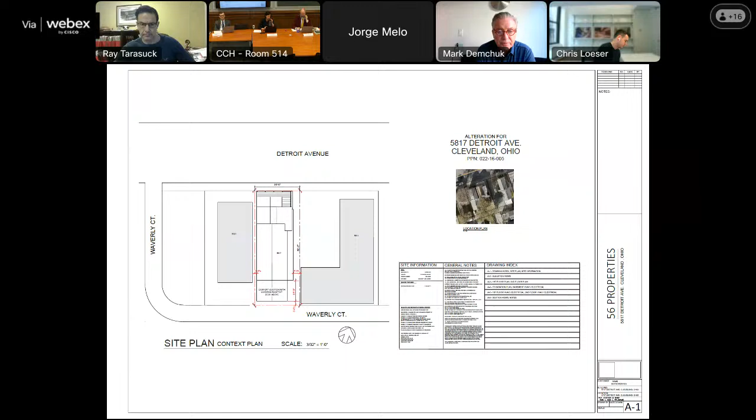Good morning, everybody. My name is Mark Demchuk. Jim Travato owns this property, and Brian Jurassic is our architect on this project. At the last meeting, we were in discussion and agreement to take down the half roof and make the doors upstairs into 2 doors.

One thing I'd like to, I'll use the word plead, to the committee, is Jim and I, after revisiting this, the expenses got out of control to take down this roof and to take the doors out. It's going to be roughly 12 to 15 thousand.

Well, the doors themselves cost $6,000, and then new doors cost $4,700. And then the roof—by the time you take the roof down and replace all the hardy board, it'll be another, let's say, $5,000. So it's becoming a very, very expensive deal.

So my proposition to the committee: this building below, the brick building on the first floor with the 4 windows, that was not the original building. Because if you look back, I think in 1895, it was not the original building. Somebody put it up. I don't know what year they put it up.

Be this said, if you look at the 2 houses to the west of me, they're exactly the same distance from the street. And again, this extension was built sometime probably in the mid-1900s, 1940, 50, something like that.

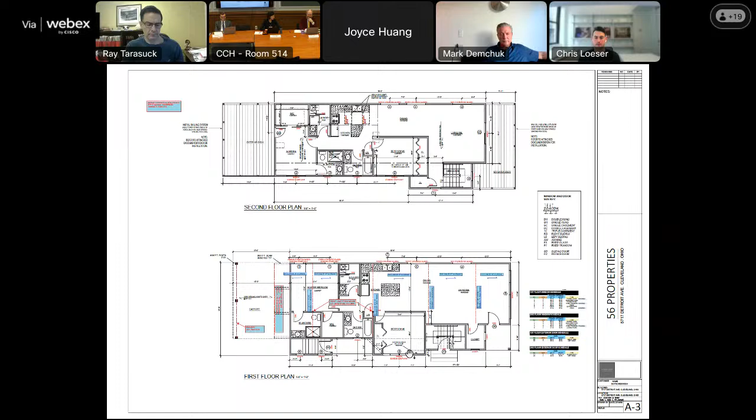Ms. Anderson? No. Should I move that we approve the addition of that porch, but with the doors the way we originally approved the doors, and for the first floor windows to be consistent with what we approved originally?

So point of clarification to Mr. Brunges, we didn't make a motion on anything last time. We tabled everything associated with it. Correct? Two weeks ago. It was just tabled in totality, but we asked that they go back to revisit those other elements. But we originally approved this project with a different configuration for the doors and for the first floor windows a few years ago. Yes, it's been about two years. Okay. But the process has been going on for...

So just to clarify, the motion on the table is to approve as presented, requiring the front elevation to match the drawing that was submitted versus the existing conditions. This would require modification to the doors on the second floor to match the drawings, a single pair of doors, and modification to the first floor storefront so that it is continuous versus the pair of windows. Is that correct, Michelle? Correct. Okay, making sure we understand the motion is very clear what we're approving and not approving.

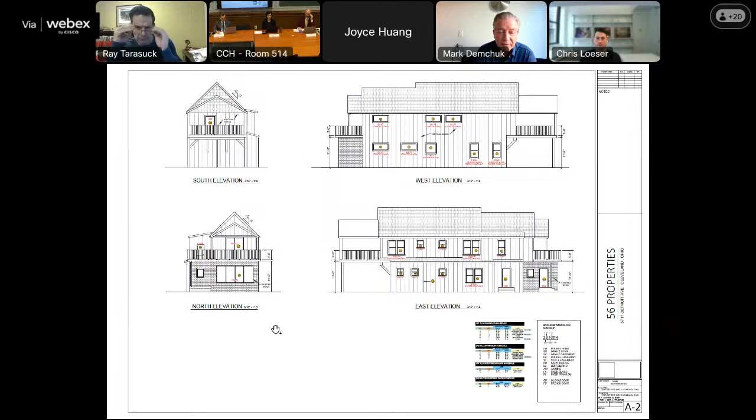Not rift, but it's very frustrating to me. So please, I'll agree, but in consideration, those 4 windows look very good with the 2 doors up on top, as you can see in the bottom left. Architecturally, the house is beautiful. It was run down before. The houses next to me are run down. I'm trying to beautify this neighborhood - I grew up here. It just makes logical sense. Everybody I talk to, including people from the city, says that front roof makes this so appealing because of that eyesore sticking out that was never approved. But anyway, I'm trying to address an architectural transgression.

So I just hope everybody can take this all into consideration. And it sounds like I'm groveling - I probably am, because it's been a very frustrating 2 years for me because I had a bad partner. But again, my partner is no longer with us. At this point forward, we'll do everything to the city's specifications. So yes, let's please table this, and I'll see you in 3 weeks.

Okay, well, thank you for your approval to table. Do we have a motion to table? I'll move to table. Do we have a second? Second. Right, we have a motion, we have a second. Any further discussion?

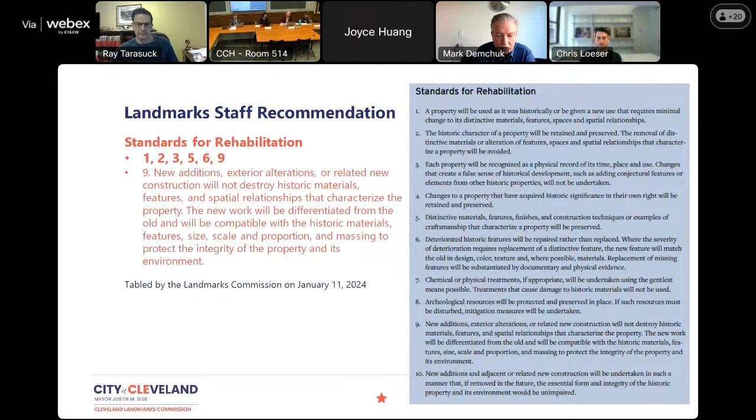Mr. Messam, please call roll. Ms. Anderson, yes. Mr. Dreyer, yes. Mr. Dulick, yes. Director Wong, yes. Mr. Loeser, yes. Mr. Tarasuck, yes. And Ms. Trott, yes. Madam Chair, the motion passes unanimously.

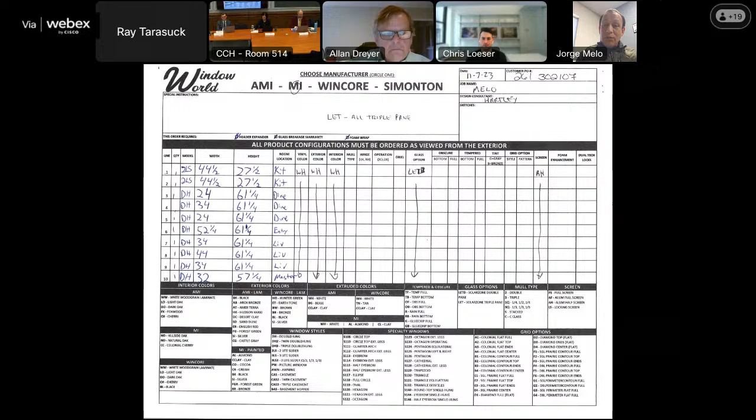The Window World estimate for the front windows is $6,910. Another quote is from Infinity Marvin, that is $16,872.10. And the last one is Renewal by Andersen, for $23,063. So that's very expensive - I cannot afford those prices. Window World is doing basically all the windows for a lower price than that.

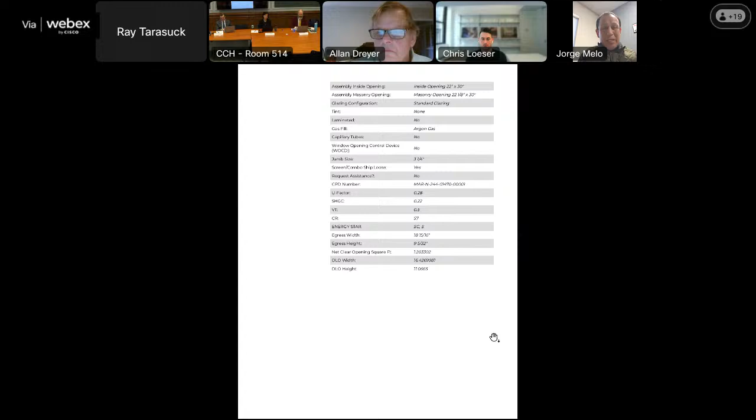And I need your support on that. I'm trying to make this place safer - I don't want to have any hazards because the windows right now are not functional completely. I'm trying to do my best to make the people living there more comfortable and safer.

Thank you for the presentation and bringing this information forward. We do appreciate it. We'll then move on to Landmark staff recommendations.

Thank you, Madam Chair. As we noted, this was approved previously with the removal of the front windows. We should note that vinyl replacement windows were approved on the sides and the rear, but not on the front of the house. The commission had asked for a more appropriate material on the front, and this has been a consistent requirement of the Landmarks Commission in my time here - we're going on 8 years at least, if not longer.

We understand that there is a cost difference, but we have to maintain the integrity as best we can of the historic districts. So we would still recommend sticking with, we understand the applicant's concerns, but we have our job we have to do as well, so we recommend the higher product on the front.

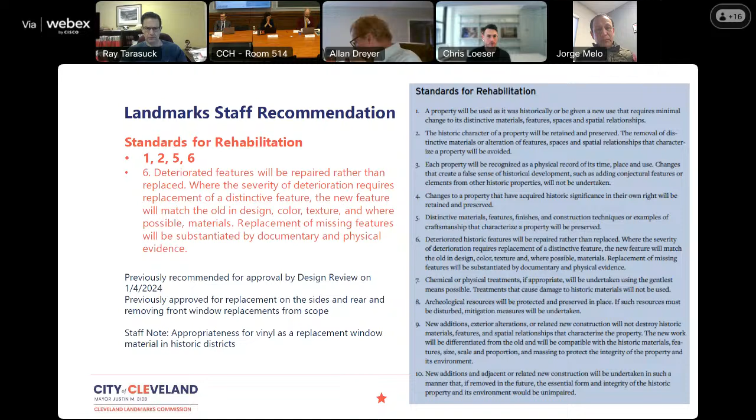So what would you recommend? We would recommend withdrawing your application to allow you to proceed with the work on the 3 elevations, and then reach out to staff offline. They can give you sources to look into funding, and you can apply once you decide on your direction of materiality and manufacturer. You could come back separately for the front. So with your permission, we'll withdraw your submission at this time.

Okay, it's good. Okay, I'm sorry. Thank you. Sorry, one more question. I'm sorry, yes, go ahead.

When will the permit to replace the side windows and all the other windows be available? Why don't you reach out to staff offline after the meeting, and they can give you more information on that.

Okay, sounds good. All right, well thank you very much. Thank you, your honor, have a wonderful day. Have a great day, you too. Thank you, goodbye now. Thank you, bye-bye, bye-bye.

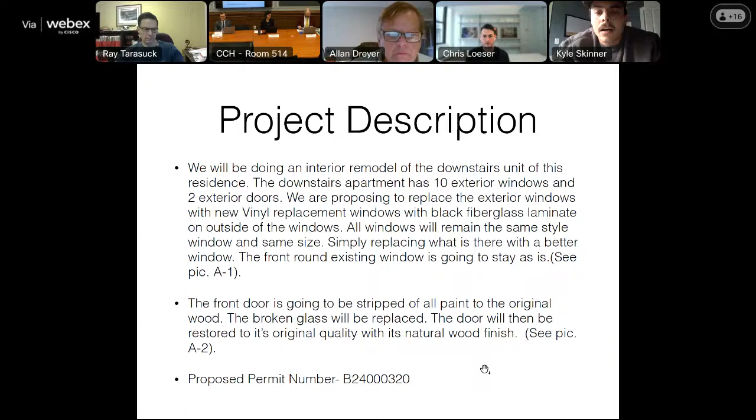Hey everybody, my name is Kyle Skinner. I'm proposing a window replacement at my property at 6614 West Clinton. Right now we're talking about the downstairs unit; this is an upstairs-downstairs duplex. We're trying to replace the 10 exterior windows on the downstairs unit. We're proposing a new vinyl replacement window, with the exterior a black fiberglass laminate clad on the outside of the windows. All the windows will stay the same size and basic style. The only other items are the front door and round window, which you can see here - they're both in pretty bad shape.

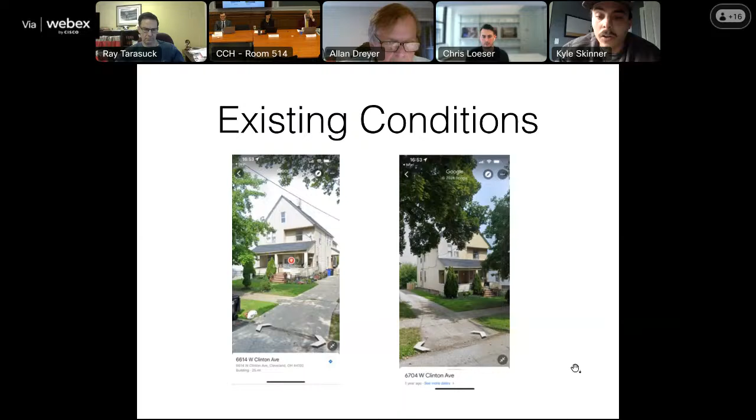We're going to refurbish both of those. We want to strip them down to the existing wood, refinish it, get new glass, and make it look like a new old door - same with that round window. You can see the existing conditions of the house; the exterior windows are horrific, they don't open, you can feel the breeze blowing through them. So we're trying to get something of a little better quality in there, and that's the windows we're proposing. That's all I've got.

Okay, thank you for the presentation. We'll move on to design review committee recommendations. Thank you, Madam Chair. This project was reviewed by the Historic West Cleveland Design Review Advisory Committee on January 17th. They approved the project for replacement of the first floor windows, with a recommendation to consider wood or alternate materials on the front elevation - there are 2 windows there - and to think about future renovations and the style and framing of the windows. There was a lot of discussion on the work done on the home, since work had been done previously on the 2nd and 3rd floor, and future changes such as siding and how the trim and windows would interact with that. Overall they thought the windows would be recommended, just with preferred higher materials on the front.

Excellent, thank you. Moving on to landmark staff recommendations. Thank you, Madam Chair. Staff feels that while the owner has made some significant improvements to this property, between what was already done without review and approvals, the several windows being proposed today, and the work required to complete this rehabilitation, we feel it's most appropriate to table this item and have the applicant come back with the full scope of work for this project, so the commission can review all of the work instead of just a handful of windows on the first floor.

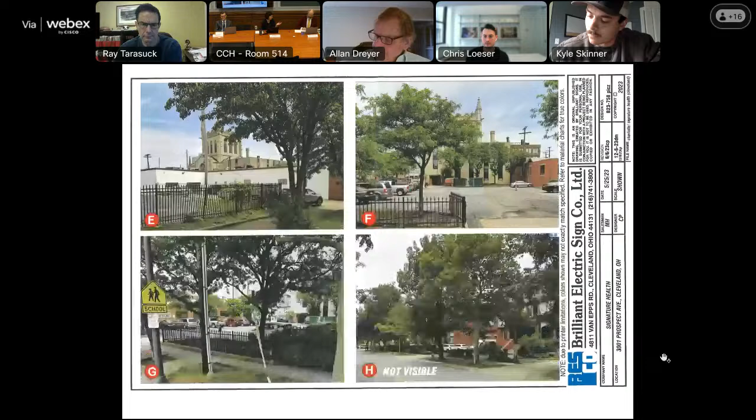You're welcome to stay for that, just to see it concluded or not. But I do have to ask, since we have permission from the owner to table, would someone like to make a motion to table?

I'll make a motion to table. All right, we have a motion, do we have a second? I'll second, Madam Chair. We have a second, any further discussion?

Mr. Musson, please call roll. Ms. Anderson, yes. Mr. Dreyer, yes. Mr. Dulick, yes. Mr. Loeser, yes. Mr. Tarasuck, yes. Ms. Trott, yes. Madam Chair, the motion passes.

Thank you, and to the owner, Mr. Skinner, feel free to reach out to the Landmark staff and they can walk you through what their recommendations are. Okay, thank you very much, appreciate it. All right, thank you.

We'll move back to our third applicant, Signature Health Orca, located at 3001 Prospect Avenue. Hi, I'm back on, I moved over to my coworker's desk.

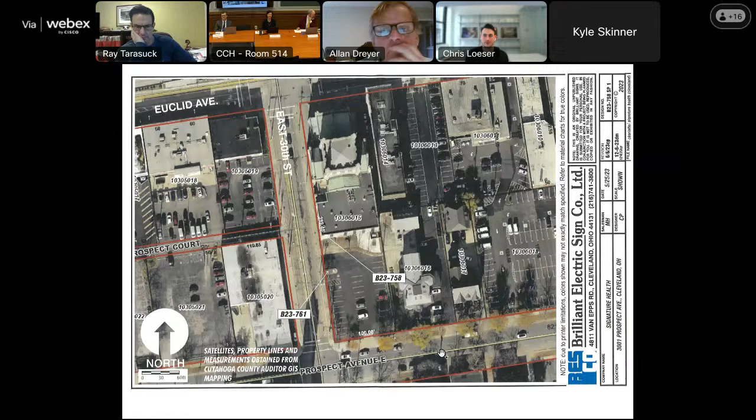I'm sorry, something must be wrong with my audio. Not a problem, please go ahead. Yeah, so I'm Laura Woima, I work for Brilliant Electric Sign Company, and I'm representing Signature Health. We were at the design review meeting last week, and they asked us to change a few things, which I'll get into, but the first slide shows the site plan, and B23758 is the wall sign.

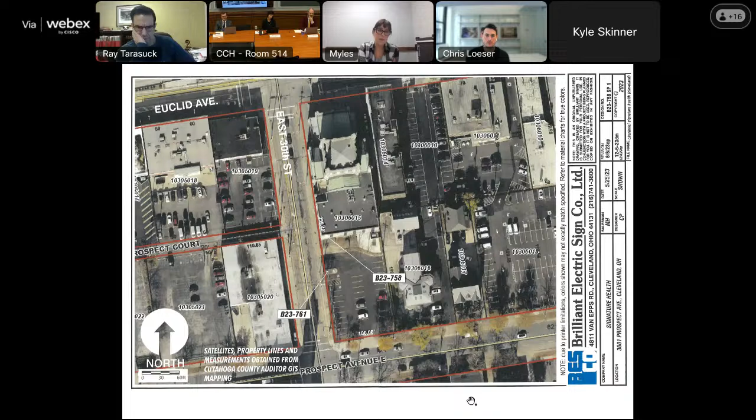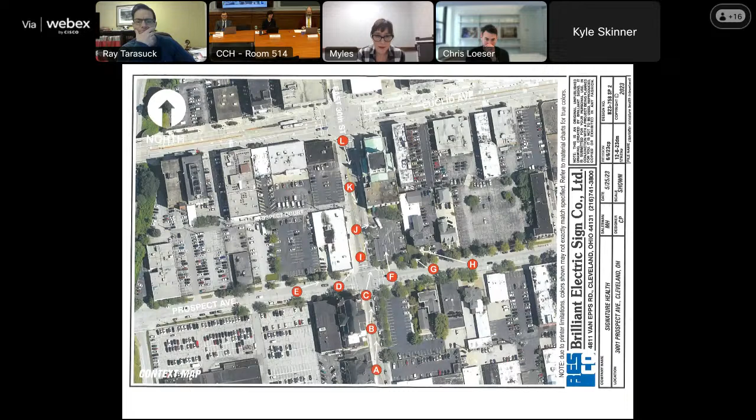And the B23761 is the ground sign. It's just an overview to show a context map of the building and different parts of East 30th.

Some had asked us why it was on that side. That's so that it has visibility, because if we moved it over to the other side, it wouldn't have the visibility for people to see it on the corner of East 30th.

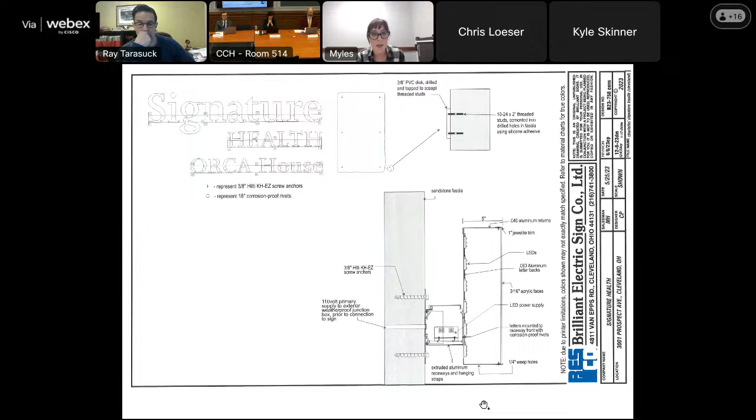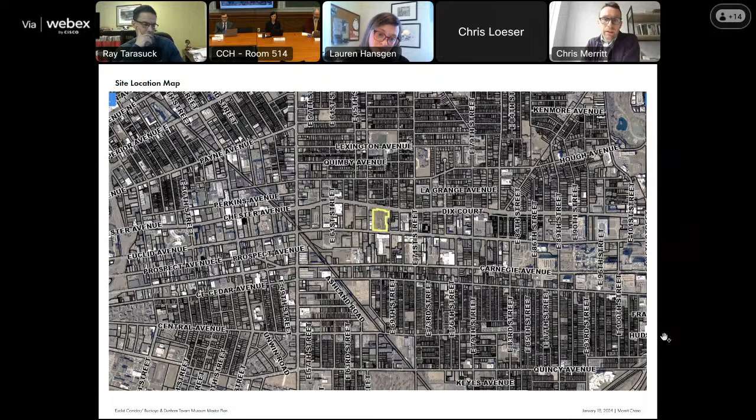Thank you, Lauren. Madam Chair, if appropriate, can I share my screen to walk through the presentation quickly? Unfortunately you cannot, the submitted presentation is controlled on this side. Okay, that's fine, thank you. Just tell us what slides to advance. Okay, thanks.

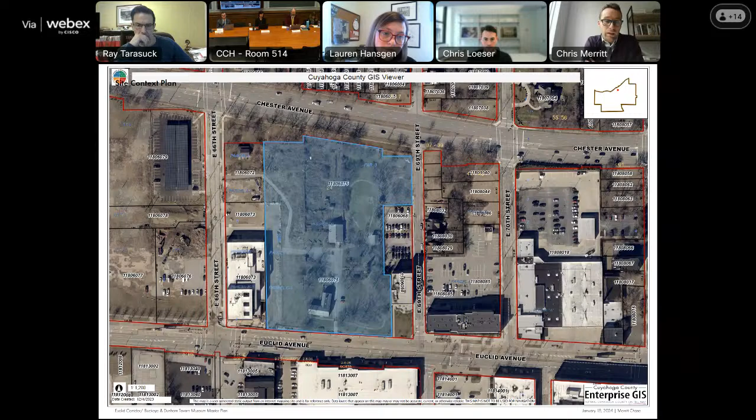These first few slides just show you a little context of Dunham Tavern Museum and Gardens. You see the blue outline here of the Dunham property between Euclid and Chester, 66th and 69th. We'll show more of this, but you can see the Cleveland Foundation headquarters, which just moved to this area on the southwest corner of the property. Next slide.

As Lauren mentioned, we've been working with Dunham on a larger campus master plan that is in context to the Cleveland Foundation's move to Midtown and much more development happening around Midtown, with Dunham as a kind of public open space at the heart of this. Next slide.

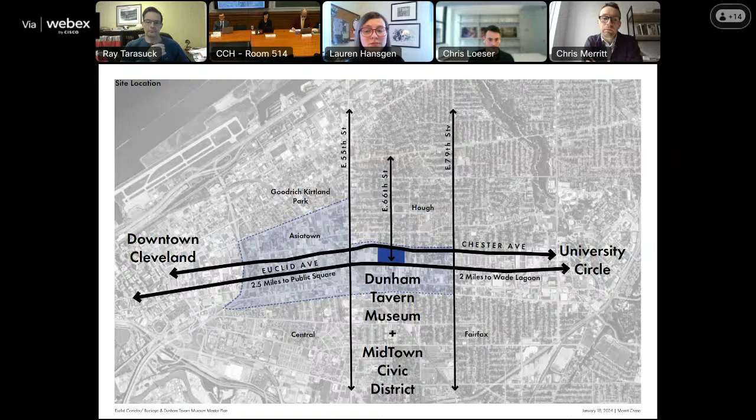This just shows a little context of some of that investment happening along East 66th Street and how Dunham connects to that. Next slide.

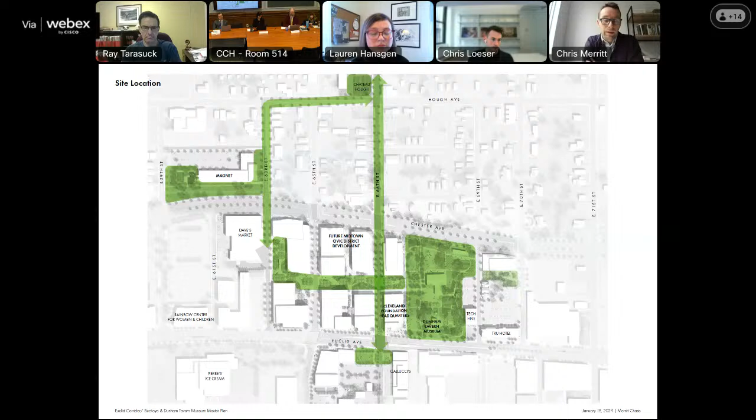As part of some of this larger planning, we've been working with many partners in the community on future development in the district. Part of this includes a new east-west greenway that would connect Dunham, the campus, to this future investment happening in Midtown and the Hough neighborhood. Next slide.

You can see that illustration here, and what we're here to talk about and seek approval for is a first phase implementation of the Dunham master plan, which includes a heritage trail, the public path that loops around the campus, and a new driveway and parking court from East 66th Street. Next slide.

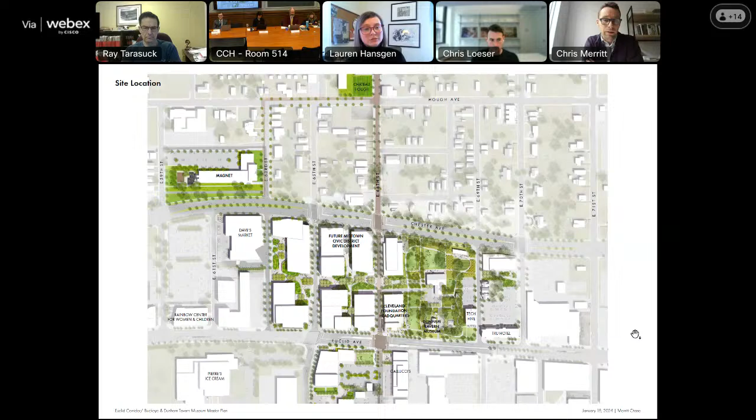Then we have a few photos, so you can see here a more current aerial of the campus with, as Lauren mentioned, some of the deferred maintenance, clearing of a fence that enclosed the property, some invasive overgrowth, and the farm that used to be on the campus just to the north of the existing barn there. Next slide.

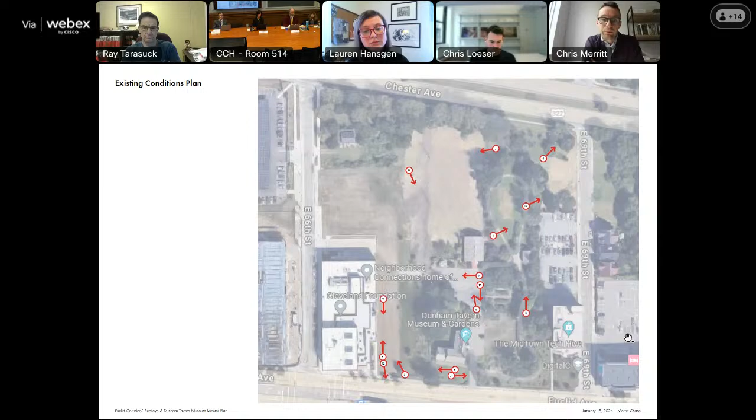You can see the new Cleveland Foundation headquarters there, where the Heritage Trail will connect that building with Dunham.

And then this is the existing parking area and driveway, where we'll be putting a new parking court thanks to a sewer district green infrastructure grant that will connect to another sewer district project the Cleveland Foundation implemented at East 66th Street.

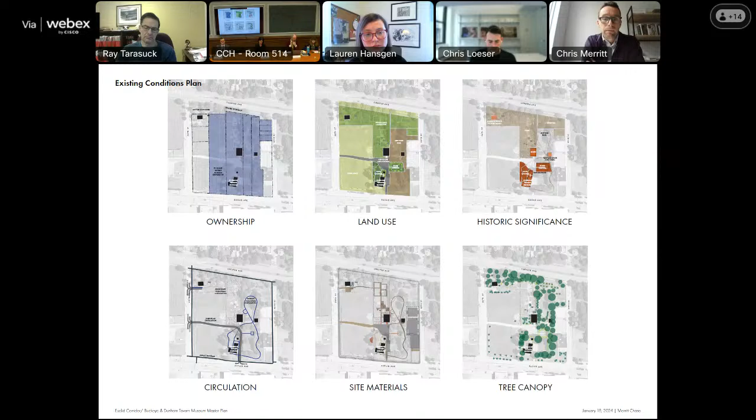Some other existing conditions, just thinking through those during the master planning process.

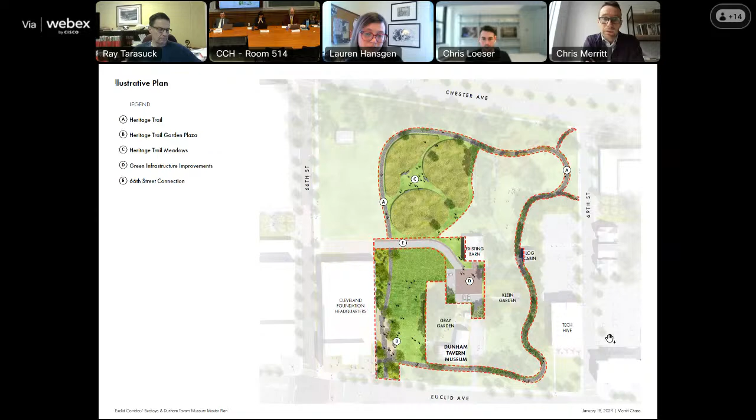This shows the full scope of that. There's also regrading of the property that will happen to align the driveway, trail, and new meadow.

Just to go through materials, the Heritage Trail will be a stone dust trail. We have sandstone pavers for the patio, permeable pavers for the parking court, and a chip seal asphalt driveway.

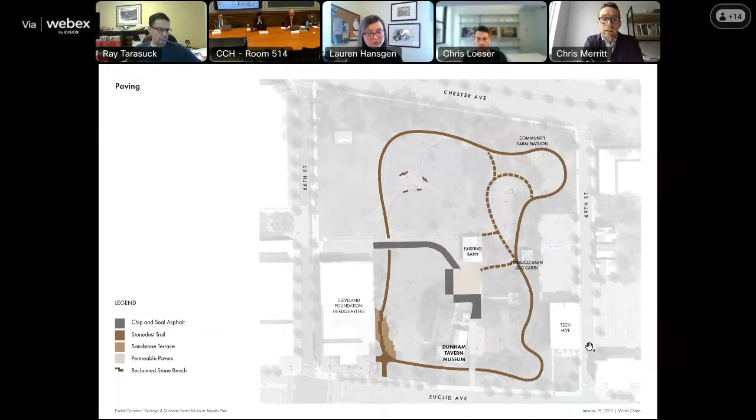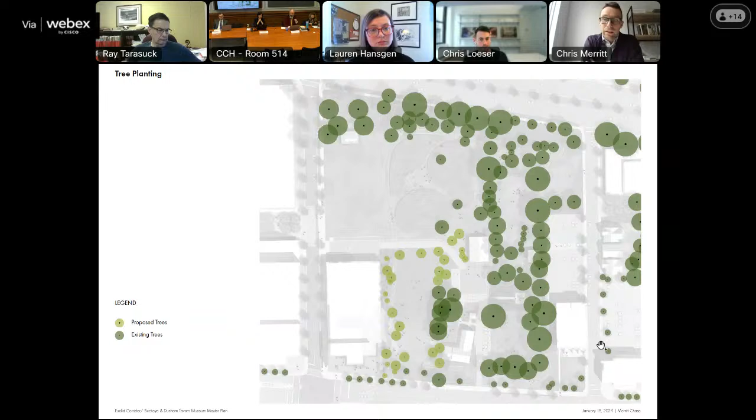We're also planting new trees on the property. Unfortunately, the recent tornado dropped some trees on the property, so we're replanting from that as well as in alignment with the new master plan.

The different planting will replace the lawn in the middle, with new garden areas along the edges, and then the meadow to the north.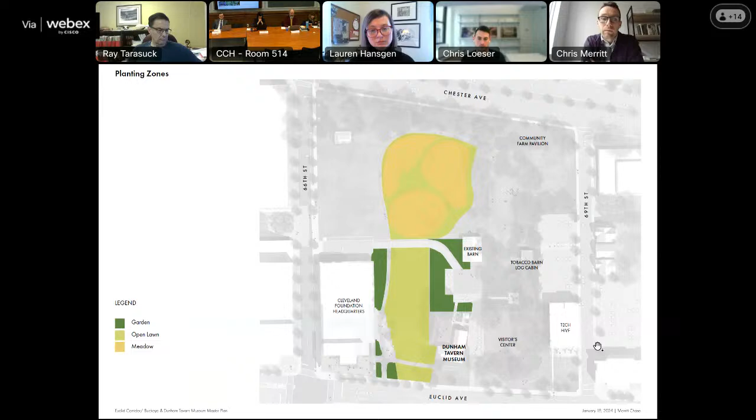This is the character of the different trees and planting, which will have four-season interest.

And then this is the full illustrative plan. That's it.

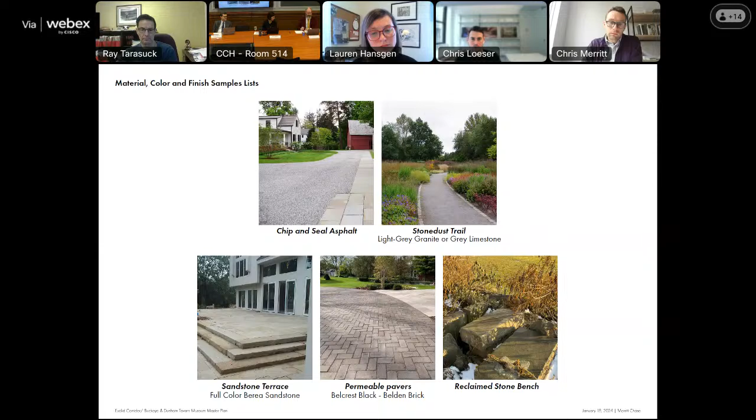Yeah, Madam Chair, it appears there's a front stoop and then some sandstone directly in front of that — you can see it in the lower right-hand picture here. It just extends out maybe 8 feet from the door.

Not sure about how old that sandstone is, or if it's something they added in the fairly recent past, but we just want to make sure that if it is historic, it's maintained. Would the applicant, Mr. Merritt, like to respond to that about the sandstone?

Happy to, thank you. In that bottom right photo, you can see a couple red flags, from an initial field test of the alignment of the path. So the path will run right up against the edge of that sandstone patio to preserve that stone. And we're actually using a sandstone cobble to address your prior question at those crossings around the driveway, as a tactile strip to promote safety and crossing and be consistent with materials. You can see some of that detail in the drawings submitted as part of the application.

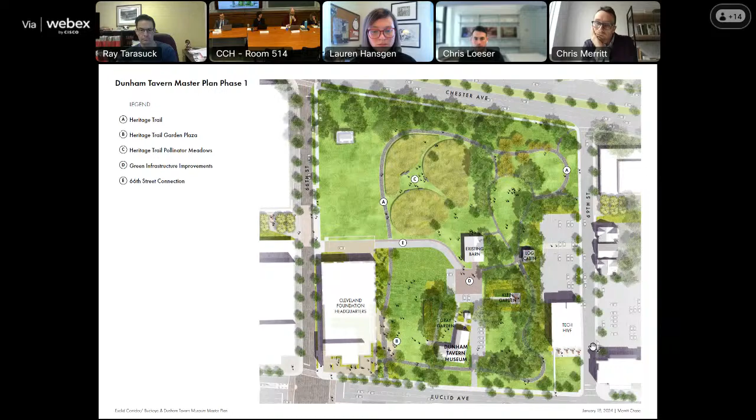Thank you for that clarification. We did have someone from Midtown here, Ms. Tzeng.

Yes, hi everybody, my name is Karis Tzeng. I'm from Midtown. To the chair, to the commission, just wanted to express support for this plan. I think it really beautifully moves the master plan for Dunham Tavern forward, and it really opens up the historical significance to the community, and I love how it's going to link neighbors to see the historical significance of the museum and the grounds. So really thrilled to see this move forward.

I will also note that I believe it integrates a number of priorities in the neighborhood master plan as well, including opening up more community gathering space, honoring these historic places, and connecting a number of both institutions and other stakeholders to each other along this corridor. So just wanted to add that to the conversation. Thank you, awesome, thank you.

We'll then go back to the commission for questions and comments. Madam Chair, I have a comment. Yes. Thank you, just want to echo the young lady who just spoke about enhancing that area, because I spent some time at the Dunham Tavern a couple years ago.

They gave a community outing. It was fantastic, it was overwhelming. They gave a tour, it's absolutely beautiful over there. The inside of the tavern itself is miraculous. Not knowing the history and how it engaged with the community, for them to understand what that Dunham Tavern is all about and what it represents in that community as a whole.

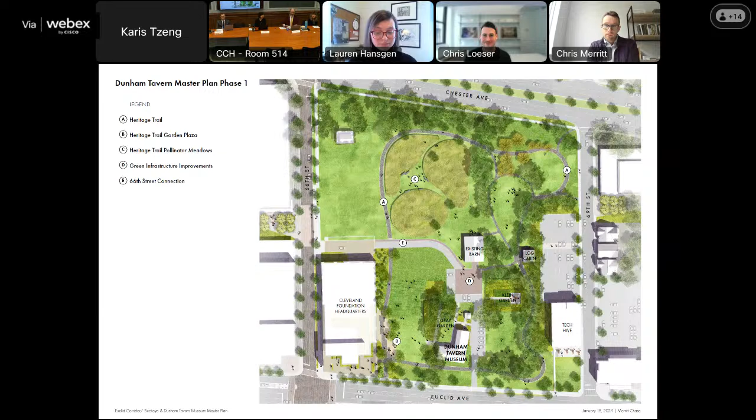Other questions and comments from the commission, or would someone like to put forward a motion? Hearing fairly unanimous support. Someone like to put forward a motion? Ms. Anderson. Move to approve as presented.

Do you agree with the conditions that staff had stated, the conditions of returning for signage and lighting? Yes, return for signage and incorporation of the sandstone, and detailing how the path crosses the drives? Yes. All right, so we have a motion with some conditions, do we have a second?

A second, thank you Councilwoman Gray. Any further discussion? Mr. Messon, please follow. All right, Ms. Anderson, yes. Mr. Dreyer, yes. Mr. Dulick, yes. Councilmember Gray, yes. Mr. Loeser, yes. Mr. Tarasuck, yes. And Ms. Trout, yes. Madam Chair, the motion passes unanimously.

Congratulations, we look forward to seeing your project move forward.

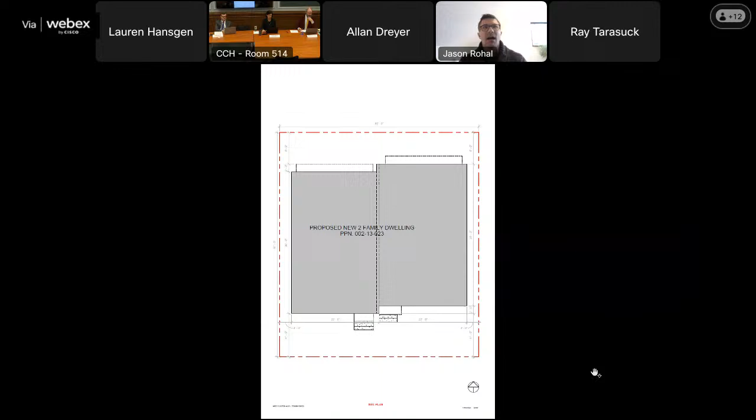Pedestrian access was very important to the block club in the neighborhood. The homes themselves acknowledge Clinton Avenue. As you're walking down Clinton Avenue, there is a large gap between 2 existing homes there, which the block club of the neighborhood were very eager to support a home that was acknowledging the facade or the frontage along Clinton Avenue.

Wouldn't mind advancing to - I think the imagery, the 3D renderings might tell the best story right here. If you wouldn't mind advancing another couple slides past the floor plans and the elevations, we can always go back to those, but going one more, please, or maybe 2 more, I think.

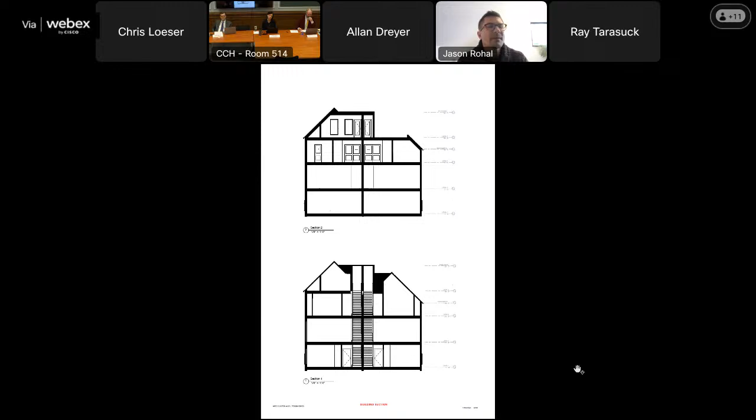Yep, got the sections in there too. If you wouldn't mind advancing another one. There we go. So these images best depict the homes as they're situated with the massing surrounding them as well.

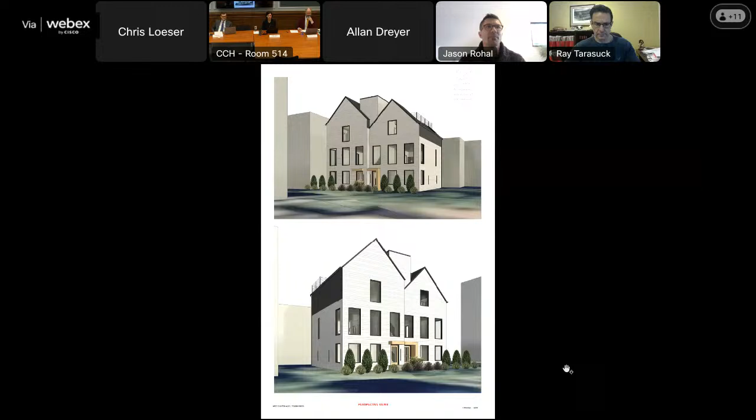So as we're looking at the top image, we have existing homes surrounding it. This is as if you are walking along Clinton Avenue, looking northwest. You can also see the large masonry building that is immediately to the north of the homes. So we're bringing in a good amount of light from the south facade and acknowledging that relationship to Clinton Avenue.

The main tenant entryways to the homes face Clinton Avenue. There are walkways that flank the homes on either side with lighting interspersed along the side to maintain some visibility and safety as well.

From a material standpoint, we're proposing Hardie plank throughout - hardy plank white siding here is what you're seeing from these principal facades. So using hardy plank along the front, we've got a tongue and groove cedar accent off the front entryways. You'll see the lighting along those areas as well. We have some plantings separating these properties from the adjacent property immediately to the south.

If you wouldn't mind advancing to the next slide, please. Along the rear of the properties, we have the same tongue and groove cedar as well as hardy plank wrapping the facades here. You see some lighting interspersed.

There was some discussion in the Ohio City Design Review meetings about the pedestrian and vehicular entry as well as the rear facade in general. We've added some overhangs, some additional materiality there, introducing the tongue and groove cedar over top of the pedestrian and vehicular access off of the alleyway.

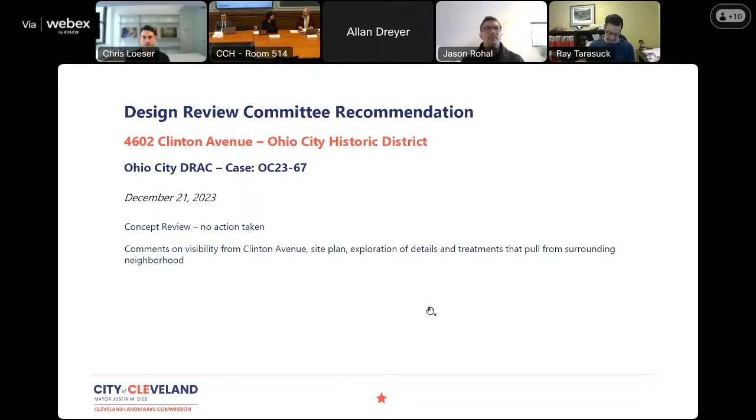All right, thank you. I'll move on to Landmark staff recommendation. Thank you, Madam Chair.

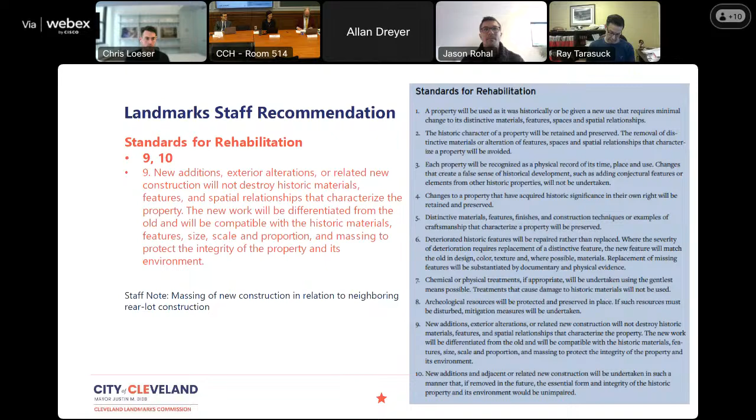We are supportive of the concept of having these homes there. The massing, I think, could be adjusted a little bit. One of the gables is slightly taller than the other, and possibly having them at the same height would be nice. The home in the rear directly next to it is about a 2.5 story building, then there's the currently backyard of the home on Clinton, and then 3.5 to 4 story townhomes a lot over. So pulling more from that context, I feel the gable is slightly overly large on one of the proposed units.

So having that still pull from the neighborhood and have designs pull from the neighborhood, but maybe adjust the height a little bit. We look forward to seeing it progress, with a clear site plan with measurements showing the distance from the adjacent houses, the street, the alley, as well as a height study and streetscape study showing those sight lines for the building and the large industrial building directly behind it. But overall, we look forward to seeing it develop.

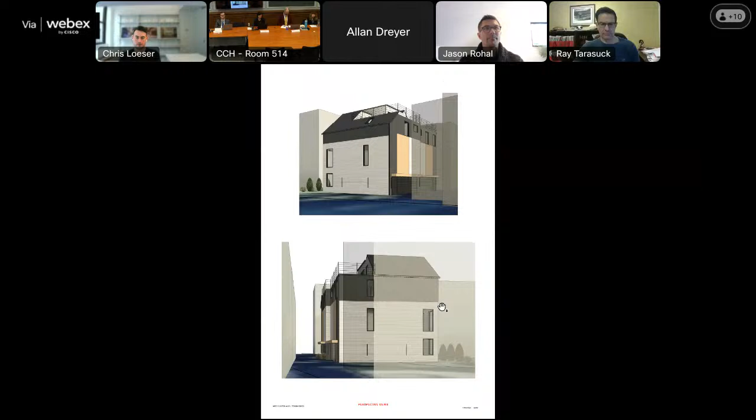Would you mind going back to that, Carl, one additional slide forward, I believe, right there. Could you explain that a little bit more? It looks like you mentioned there's garage doors and man doors on the lower level. And then what's the brown material wrapping it again?

Currently, that's proposed as the tongue and groove cedar, but I think per Mr. Loeser's comments, it will likely move towards a composite material that is going to give some warmth and is a little bit better from a durability standpoint. And then what are the two colors adjacent to that, yellow and white? So the yellowish color, that's the tongue and groove cedar currently proposed, and then the white is just the white hardy plank.

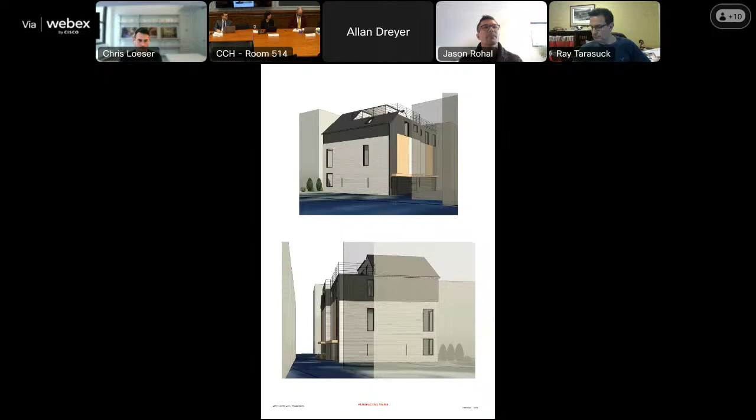Okay, going through that in a little more detail would be helpful. So that whole wall is solid, there's no windows besides the third floor. That's correct, and that's a product of there being a dark brown large industrial building immediately adjacent with zero articulation whatsoever on it. So with the design of the northern facade, you start to have windows as they barely peak above the roof line of that existing building, and then you have the occupiable roof deck on the upper level to be able to get over the height of that building.

I would encourage you to look at adding windows here. Although the view may not be great, the daylight would be nice within the spaces. I think sometimes you forget how many people actually put up curtains and shades, so it's not always the view, it's often the daylight and allowing that into the interior of the structure. So I'd encourage you to explore adding windows here as you rethink the materiality.

Madam Chair, I think it's a really interesting project, and the whole concept for the staff comments of these back houses, I too like the variety and the height. I just wonder if I'd like to suggest exploring maybe some of that variety between the two distinct houses based on height, not just limited to those upper parts, but let it filter down with a little more differentiation. It's almost like the first two floors are pretty much the same, and then you vary the top. But I think that's actually a way to reflect the historic nature. If they were two separate houses, they wouldn't necessarily have been the same height, so I think that's really charming.

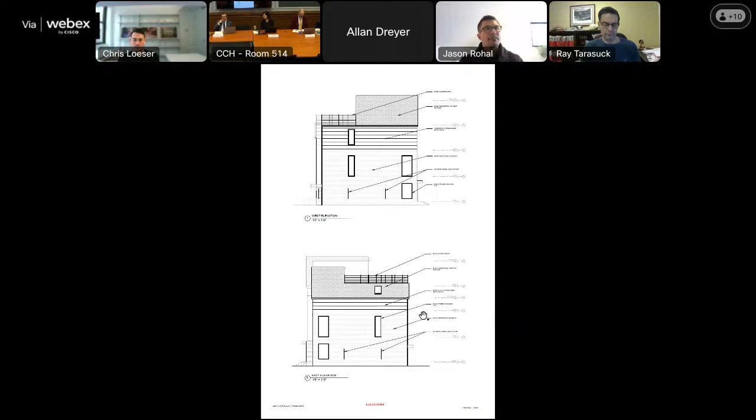But the modern vernacular, I think, can be appropriate, especially because it will be kind of glimpsed, I guess. The window comments are taken to heart from Ms. Anderson. So yeah, I agree with a lot of my fellow commission members' comments, but I'd like to see some more exploration for that variety, in the spirit of honoring the historic quality of this whole enterprise of two back houses. But I think it can track through a little more and still be a modern expression. And the color, I think the white does really make it pop, so I guess it's a question of whether that's good from a neighborhood urban design perspective, or whether it might want to recede a little more with a gentler color scheme. Thank you, good presentation.

Any further questions or comments from the committee? Mr. Brundges? Madam Chair, I apologize, something that just noticed while I was looking at this thing.

On the other drawings, we show downspouts on the outside ends. How will the drainage from the roof in the front, in between the two units, be addressed? Because it looks like the way it's pitched and the way it's coming down, it's going to come down right on that front door, on the interior.

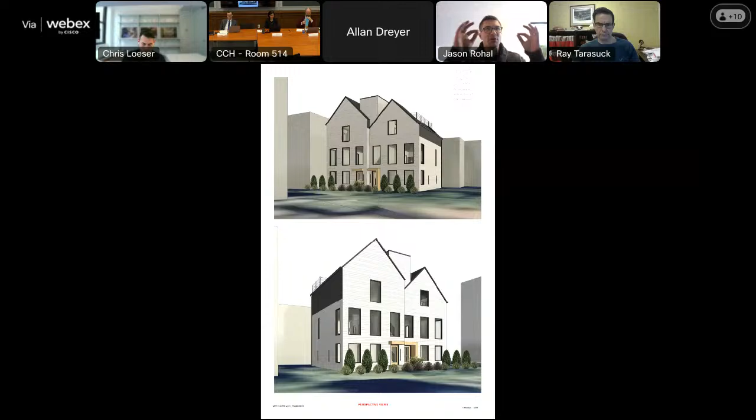Yeah, so right now, anything shown as appearing flat is all sloping towards the north side. The gutters and downspouts are shown towards the north side of the home, so you'll see them kind of peeking through right there. But there would be a slight gutter line if it's not shown currently right there—everything will slope towards the north side of the home. Along the south side, I saw someone's cursor along that south side; that's basically just the fascia kind of peaking. There's only maybe an 18-inch or 12-inch portion of that fascia that peaks in front of the stairs at the southern portion. So right there, it's essentially going to drain down in that same plane as the overhang. We could tuck a gutter, if necessary, on the south facade, kind of in that juncture point between the two masses. But on the north side, everything is draining along that pitched roof to the north side.

Right, yeah, just look at how that little step between the two buildings and that little piece of roof is coming down. I think that's where Mr. Bruggs is focusing, so that you take care of the water versus having it go on the floor.

Understood. Madam President, yes, I just have a question. I'm not familiar with this particular historical neighborhood, but just listening to the other comments from my colleagues here—the townhouse structure that you have in that community—does this townhouse fit in with what the other houses look like? We know that the modernization of homes will be changing in the historical districts per se, and I understand you have to use certain materials for the change to be approved. However, would this particular structure flow with the other homes in that neighborhood on that street per se?

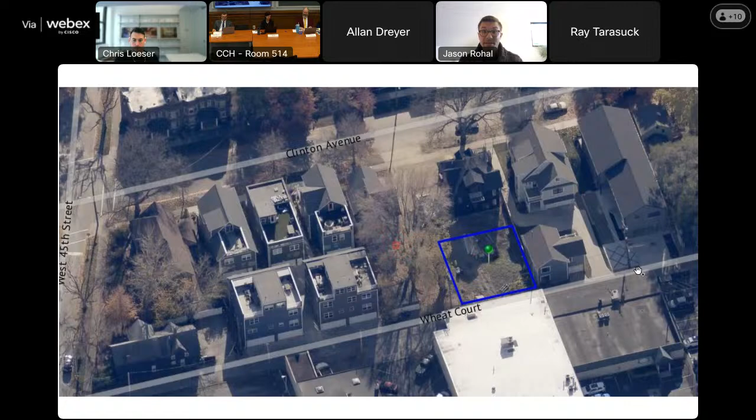Thank you. Not seeing any additional feedback from the commission, does the applicant feel we received enough feedback to continue developing your design? Yes, absolutely, and I really appreciate all the feedback everybody has given. All right, thank you, we look forward to seeing you come back with your final design. Thank you so much.

We'll move on to our next applicant, located at 1898 West 25th Street, shell improvements to that building.

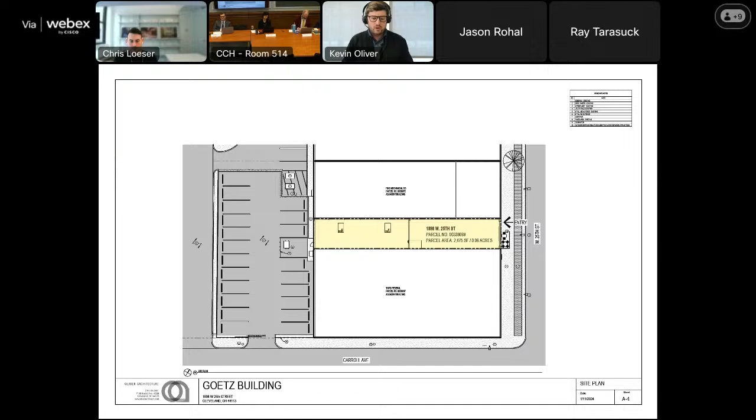The site plan shows West 25th to the right and the rear parking area to the left. The building has a taller three-story portion towards West 25th and a lower two-story portion towards the rear. Mechanical units and exhaust fans are proposed for the lower roof portion, not visible from West 25th Street, since the third floor height will conceal that.

On the West 25th side, the proposed alterations are to install a new storefront at the ground and transom levels, then repair the trim work and repaint the rest of the facade. The second story fixed storefront windows would be replaced with new ones, keeping all the applied detail, including the spindles and paneling below them.

Those would be retained, repaired, and repainted. Moving up to the third floor, we're repairing the existing hung windows, repainting them, and installing a new storefront where there's currently a compressed opening, enlarging that, then replacing and repairing paneling around it to match the rest of the facade.

At the rear of the building, as the photo showed, it's not in great shape right now, so we'll tuck point, repair, and replace openings with new ones. From our local design review, we discussed the existing fixed gridded lights at the back, which this image shows infilled with three double hung windows. We'll propose replacing that with an in-kind storefront window, not adding more masonry, keeping that opening intact. On the right you can see where the rooftop units will sit, shaded in gray, with the lower roof sloping slightly up to the three-story portion beyond.

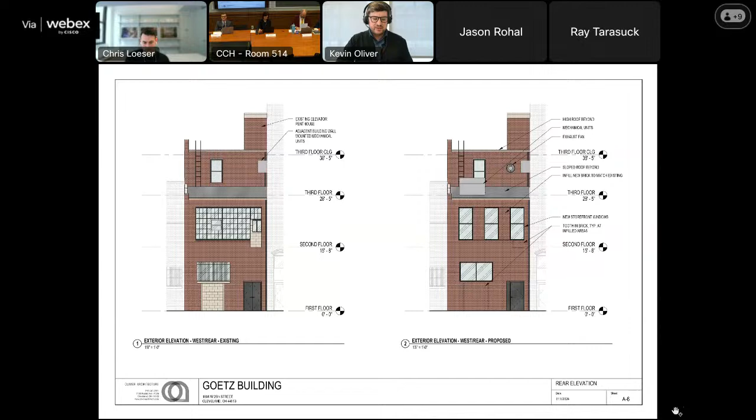There are some existing CMU infill openings; we'd remove those and tooth in new brick to match the existing.

Material-wise, we have a charcoal storefront system throughout the front facade. Trim and other materials, like fiber cement that are added and repaired, will be painted to match. In the transom area, we're proposing a painted metal grid to recall the prism glass that once existed there, giving a sense of that in our new alterations. We're also proposing wide stile storefront doors and rehabilitating the brick and stonework on the front, cleaning and tuck pointing as necessary to bring the building back up to standard for today.

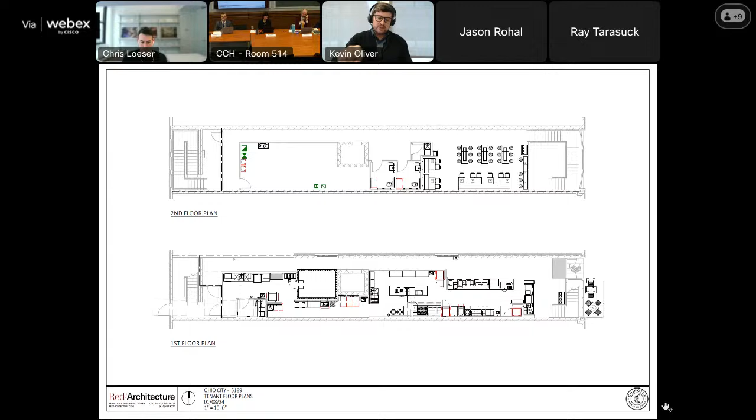Just for context, the floor planning and use of the building: the first floor would be the kitchen and ordering area. Part of the project is to install new stairs at the front and rear of the building, and an elevator. On the second floor, which is on top of this image, is where the seating area would be, and you can see how the front stairway has an opening between the first and second floor.

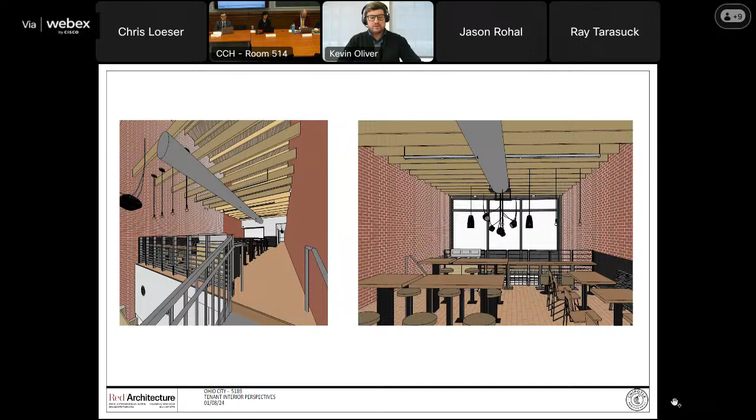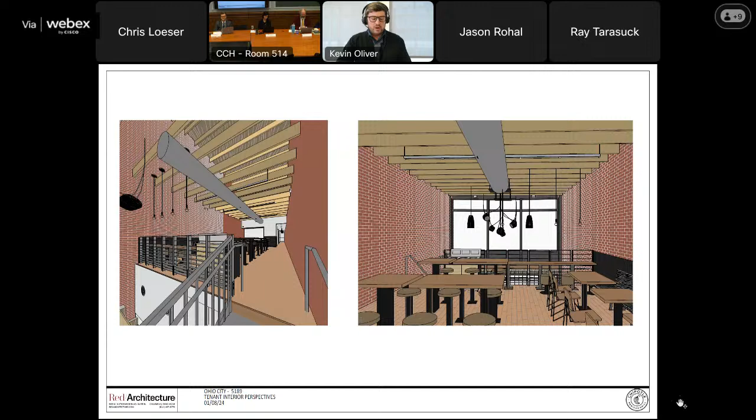Next slide. These are some schematic interior views. The one on the right looks from the second floor dining area out through the front facade facing West 25th. The image on the left is at the top of the stairs as you enter that second floor area, looking away from West 25th into the interior of the building. You can see the exposed framing there.

Next slide. Again, conceptual views. The left one is on the first floor looking back towards the front West 25th facade of the building—you can see the new stair wrapping up and its opening. And on the right, looking back towards the interior from the entry doors off of West 25th.

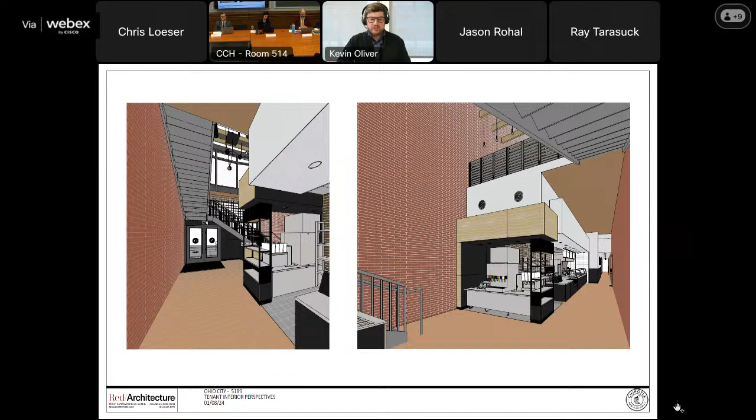Next slide, and I believe that is the conclusion. Again, happy for questions. Thank you for everybody's time.

All right, thank you. We'll then move on to design review committee recommendations.

Thank you, Madam Chair. This project was reviewed conceptually by the Ohio City Design Review Advisory Committee on January 18th. There was a lot of discussion about the West 25th facade, about the prism glass that was removed from the transom windows, and replacing upper floor windows with commercial systems. There were concerns about that, as well as the mesh being installed behind clear transom glass and its visibility.

There was discussion about the glass divisions for the transom and storefront windows, as well as the window configuration noted in the rear. Also a discussion about exterior signage that says 'blouses and dresses' painted on the second floor, which the committee would request to have retained if possible.

All right, we'll move on to landmark staff recommendations.

Thank you, Madam Chair. Some of you have been on the commission long enough to recall that another rehabilitation of this building was proposed and came before us in 2016. At that point, the owner had removed the prism glass transom windows without permission, review, or permits, and was planning on reinstalling them as part of the rehab.

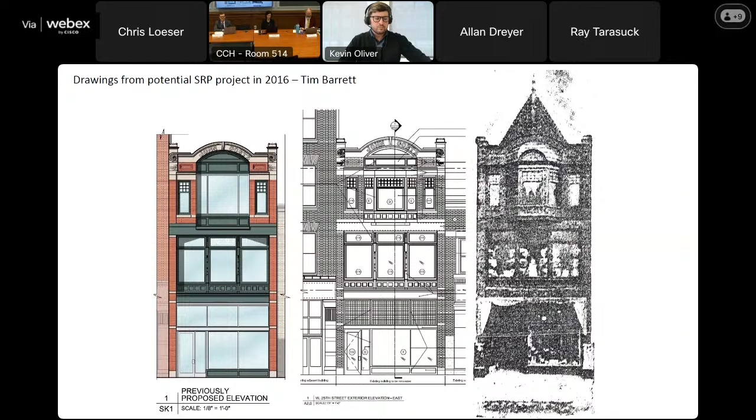We also noticed in the drawings presented, there's the RAM name that appears just above the storefront. I don't believe that's a historic name. I think that was just left over from RAM Electronics that was there for many years, and those are just little wooden stick-on painted signage. So if we can confirm that's the case, those should probably be removed. I just noticed they showed up in the drawing, so wanted to bring that up.

Our other big issue is the treatment of the 3rd floor windows. Tim Barrett from the Storefront Renovation Program produced a couple different options of how this could be handled, which are on the screen now. We're not saying it has to be one of these options, but with the historic images of the building we have, there is strong enough evidence to develop an appropriate replacement for the oriel bay that once looked out over West 25th Street.

We're very pleased to see some attention paid to this building and that it may finally be rehabbed after years of sitting by and watching the neighborhood improve around it. However, the historic character of this property is not being preserved as presented, as they propose to remove distinctive materials and significantly alter features and spaces that characterize this building, which is in direct nonconformance with the Secretary of the Interior standards, specifically Standard 2. This building is an architectural treasure and needs to be respected as such.

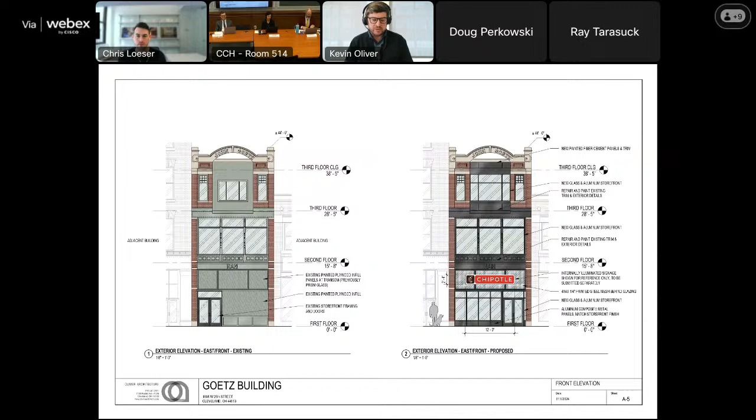Does the applicant feel like we received enough feedback to continue the development of your project? Yes, thank you. As you stated, we'll be in touch with staff and take the comments and continue with our process here. All right, thank you. Like we said, we like the developer, we like the proposal. It's just the front elevation needs to continue to be developed. Thank you.

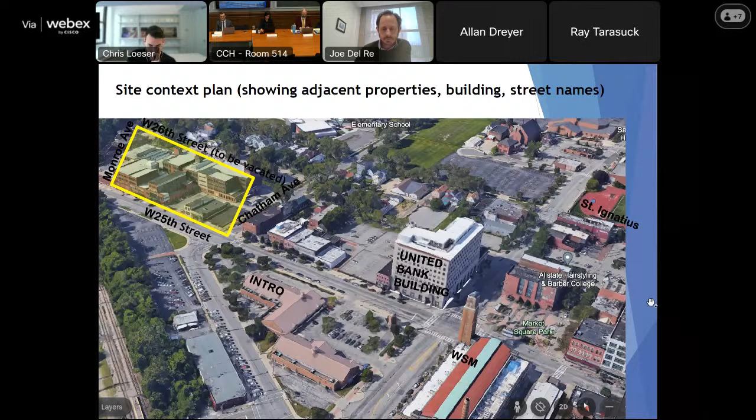So this is the West 25th Street facade, and I think it does a nice job of talking a little bit about the complex in general. The facility is comprised of 18 buildings. It looks like it's one factory, but it's actually 18 buildings built between 1870 and the early 2000s.

Our concept for this project is primarily a residentially driven redevelopment of the factory. But a key aspect of it is to break up the buildings back into some of the component parts by daylighting the vacated alleys of Hancock Place and West 25th Street Place. That would create some segmented buildings that we'll get into in a little bit, but also provide these interesting pedestrian walkthroughs that really create this into an urban village and connect it back to the other projects that have gone up in and around it over the past several years.

To open up some of the space and air, we'll also undertake some very minimal demolition of those alley covering areas, which we'll see at other elevations. If you can move on to the next slide.

This, I think, is going to be one of the central themes of the whole project. One of the ideas that got us very excited when we looked at the project was this parking lot, which right now is unassuming and rather boring, but when we take a closer look at it, you see some critical things. One is we already own the Citizens Pie building to the north of the lot. The idea of wrapping this parking lot with engaged retail or food and beverage uses and creating this almost like a central park or central green for the overall project is really what got our thinking going there.

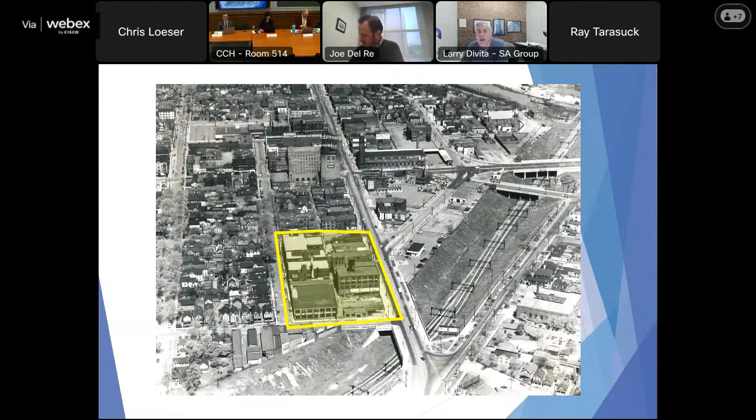Because each building section has its own character, the emphasis is to maintain the historic character of each section. Going through the process with SHPO and the National Park Service, it was very important to restore the masonry, replace windows selectively where necessary, and maintain the character of the building.

Thanks, Larry. If we could get into the site plan. Our conceptual site plan on the first floor—I think it's important to mention what we're hoping to do today is focus just on the redevelopment of the existing buildings themselves.

On the first floor, we'd like to eventually focus on a retail or other use strategy, but for today our conceptual concept calls for parking on the first floor facing West 26th Street, along with a residential lobby, leasing office, and bike storage area for both visitors and residents. We're also planning a fitness center on the first floor as a residential amenity.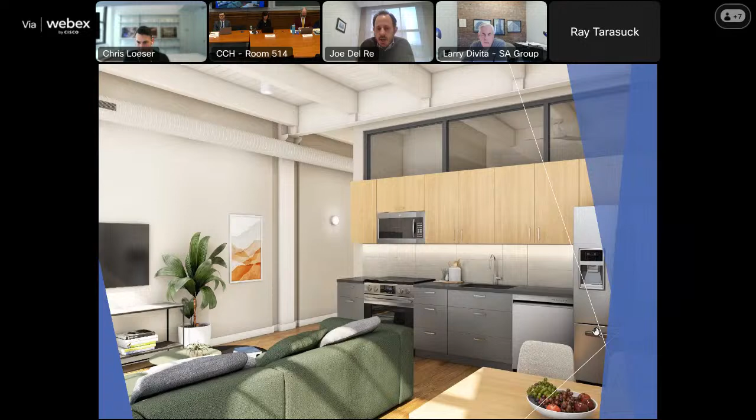The next slide gives you a concept idea of the design direction we're going for inside the residential suites. You'll notice some of the features being driven by the historic requirements, by SHPO, requiring us to keep some of these elements open.

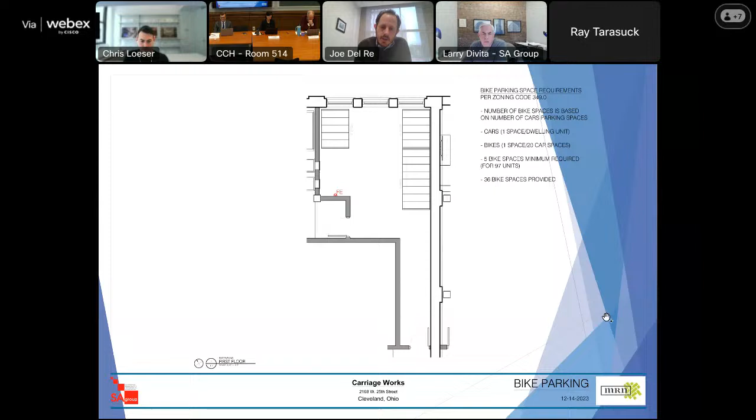The next few slides are just some residential amenities. We initially called for a 36 bike parking garage, but we've actually expanded that into a larger parking facility in our most recent updates. The next slide shows a proposed fitness center for the residents. Then the next slide brings you into a co-work concept that we're thinking about as an amenity to the residents so they can get out of their apartments and commingle in a work environment.

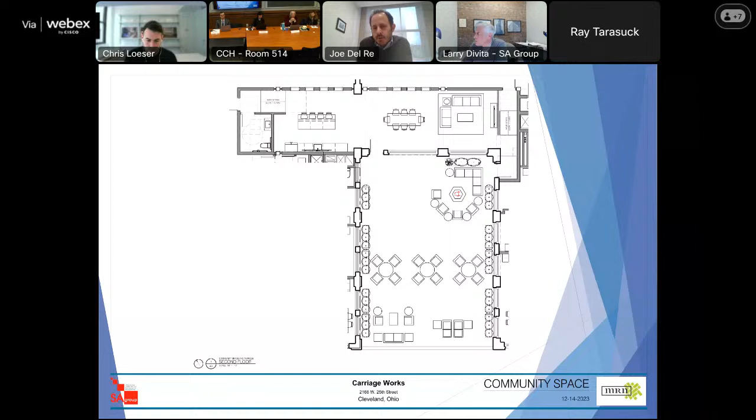The next slide shows a concept for a rooftop patio that we're looking at. There is a building called Building 12, it fronts on the alleyway. We are playing with some conceptual ideas of removing the corrugated metal facade and opening that space up for a rooftop park. This also shows another rooftop patio that may occur, fronting on Hancock once we open that up.

I appreciate the opportunity. All right, thank you for the presentation. We'll move on to design review committee recommendations.

Thank you, Madam Chair. This project was reviewed by the Ohio City Design Review Advisory Committee on January 4th, as a concept, so I did not make a motion. The committee members present were very excited about the proposal. Some of their comments included questions about the periods of significance established by SHPO and NPS, the possible lighting plan especially in the alleys and around it, and concern about a referenced vacation of West 26th Street and Hancock Avenue.

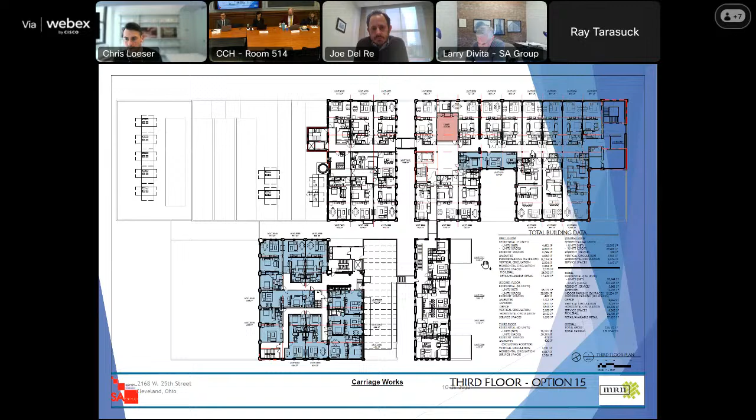I do agree with staff's comments and the local committee. I commend you for taking on such a large and gnarly little project, if that's the only way I can describe it, because there are so many different buildings, floor elevations, and so forth. I really do commend you, and I think this is a really creative reuse of the buildings and the entire site.

I'm just trying to get my orientation with some of the comments about the West 25th Street elevation removal. So this is 26 we're looking at now? If you go back a couple slides, or back further to the existing pictures from the beginning of the presentation, you'll get a good view of it. Right here. Yes, similar to that, just to keep the top portion, sure. I got it, okay.

So it really comes down to the details if we're in that much nitty gritty, which is excellent. Overall, what you're proposing I'm in full support of. But looking at the details the local committee raised about that small area on 25th Street, it would be nice to maybe maintain that, or put a gate there for the residents, to maintain the second floor brick elevation so you have a continuous elevation like there is now between Monroe and Chatham. I do think it would be good if that could be retained, even with removal of the covering over that alleyway.

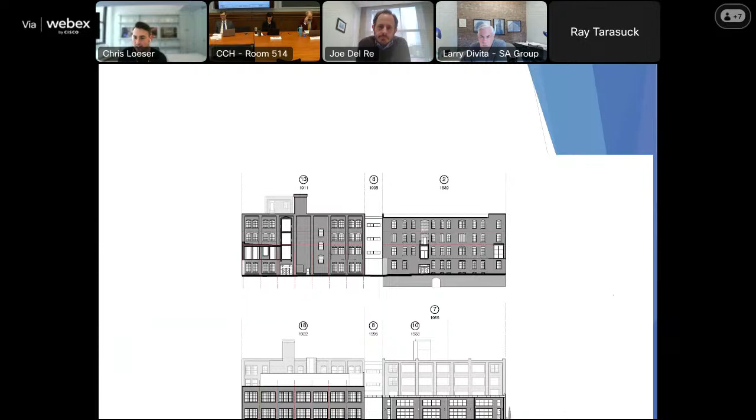Other questions and comments from the commission? Mr. Loeser. Thanks, Madam Chair. I too want to commend this group on taking buildings that are sort of there today and providing a higher and better use with residential and everything. I have a couple of questions or considerations.

One of which is, right now, the existing buildings, it seems like there's a first floor datum around almost the entirety of the property that's a painted, faded red. I think just paying close attention to what you're going to do to have it feel different. I don't know if the plan is to re-tuckpoint everything, if the intent is to repaint, or if the intent is to clean off all of that and expose the original. So just thinking about the consideration of that.

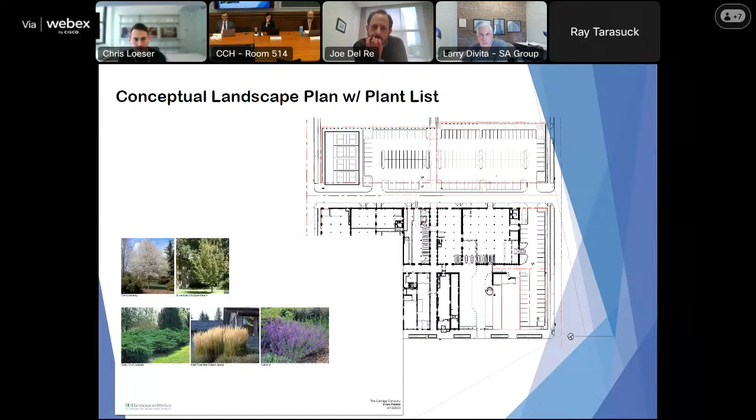The second, if you can go to the site plan again, maybe the earlier one. Dan, if you scroll down, I think it's a slide right after the historic pictures. I think slide 20. There. Yep. Awesome. Thank you.

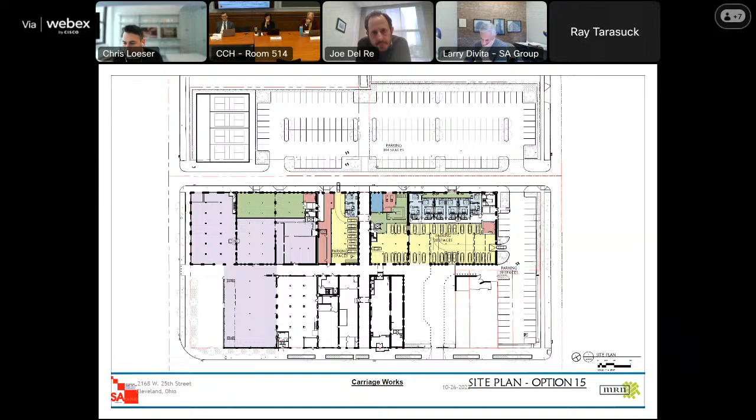So thinking about vehicular circulation to the parking that's at the first floor, it looks like there's an entry point off of West 26 to get to one side of the parking. It looks like there might be a circulation path through the open parking lot area, between the existing buildings and adjacent, and then the buildings as part of this project. And maybe it looks like there's another entry point off of the existing parking lot, I'm not sure exactly which is the cross street, to the right-hand side of this page. But just thinking about how vehicular circulation and pedestrian circulation happen within this complex. I don't know if this is the highest and best way to get the cars into the buildings or not, but just thinking about how those circulation streams happen with one another.

What else? So I'm also really intrigued by that idea of that central park concept, or that community amenity space within that open lot. And I'm really intrigued about how that continues to develop. I think that could become a really great amenity, not just for the residents here, but really bringing more people down to this area of West 25th. I mean, there's been a lot of progress marching south, and I think this is really going to add to that. So thinking about how that really integrates into that urban fabric, I think is really, really exciting and really compelling.

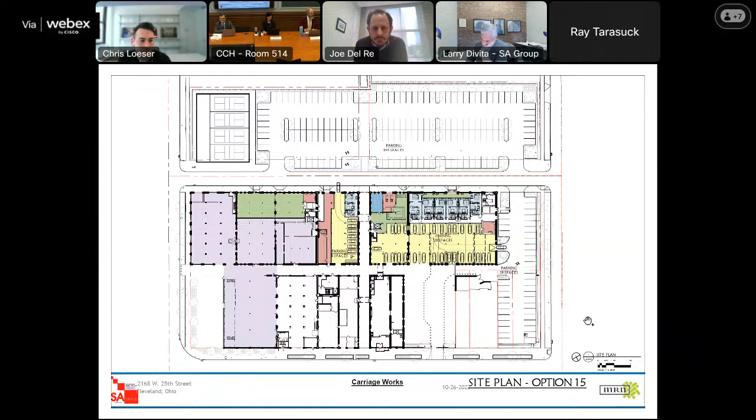If you can go to slide 16, I think, the one that shows the original bird's eye drawing. This one here. So I'm assuming this is looking at the West 25th Street side and not the 26th Street side. Yeah, that's right. This is looking from, you're hovering over the entrance to the Greenway here, so you're looking at Monroe and 25th. Awesome, thank you.

So I guess one consideration here is the alignment of the facades is of course different today than it was back originally. If you look further to the right hand side where you see the existing adjacent building, and there's a shorter building that has been demolished, I think that's where the open lot is. And then I think where the alleyway is showing might be the alleyway we're going to be reopening between the two blocks. But has there been any consideration to, I think there's a lower building that separates some of the taller buildings, is there any consideration there of bringing it back to maybe infill the upper floors to create more of a solid block between the two taller sections of buildings? And again, I don't know the history of how all of these things came into being or whatnot, but I think there's something about this view that provides some continuity of what this feels like as a mass, and less about piecemeal buildings that have progressed over time.

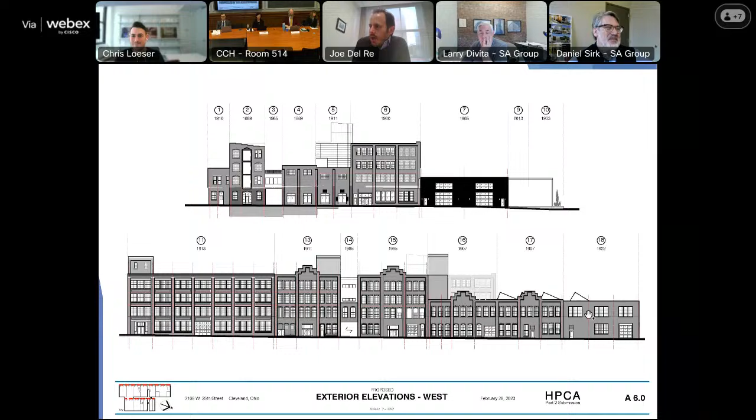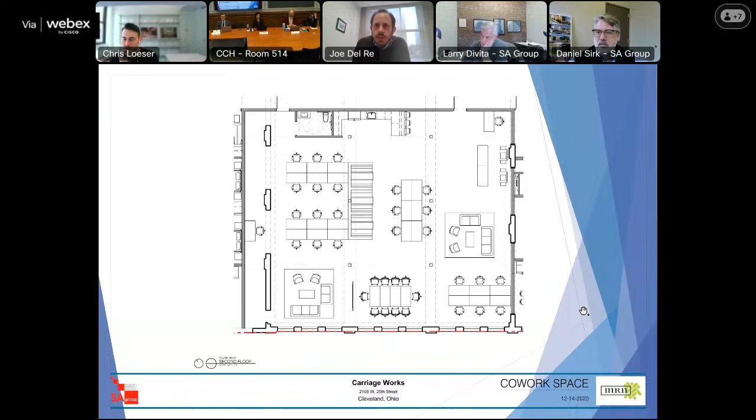That's a great question. We've been actively working with various lenders as well as other institutions. We are pursuing conversations with OAQDA in the state of Ohio. Obviously this has been a challenging and evolving financial market, so we're actively engaged with various lenders right now. We've been working with Dan and Larry and our engineering teams on moving this into almost like a phased project, so we could come back with a first phase, doing half the project this year. We are hopeful to be back in front of this committee before the summer to talk more about it.

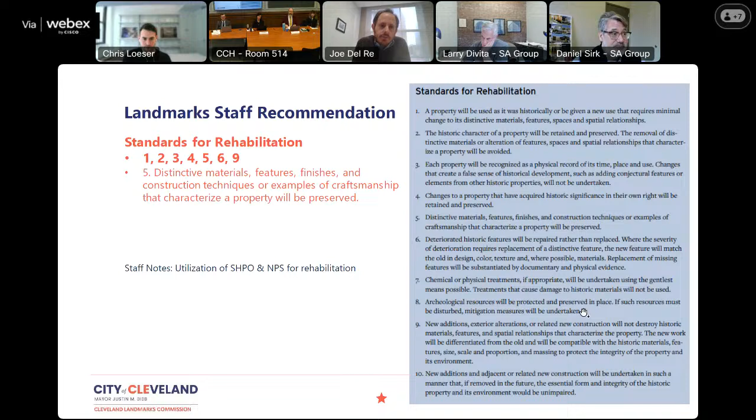Okay, all right, thank you. Excellent. Well, not seeing any further questions or comments from the commission, do you feel like you received enough feedback that you can continue the development of your project? Absolutely, thank you for the helpful comments. All right, well, thank you and good luck. We look forward to seeing your final proposal. Great, thank you.